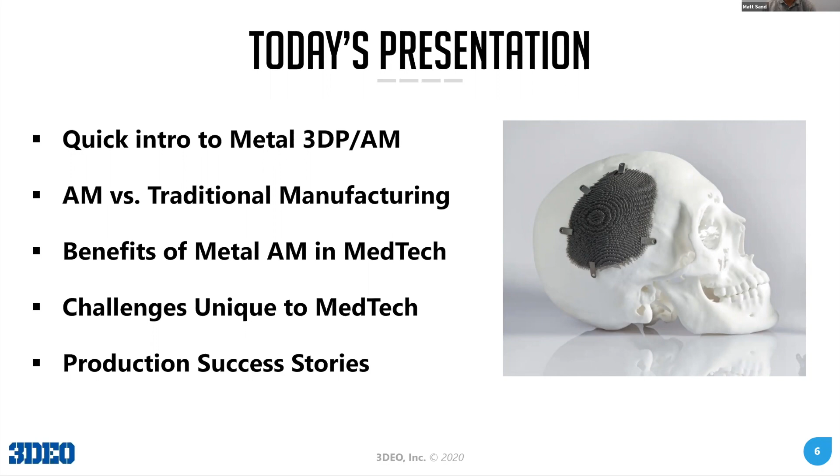So let's talk about today's presentation and what we're actually going to cover. We're looking at first a quick intro to metal 3D printing or additive manufacturing. We're going to compare additive manufacturing to traditional manufacturing, and we're going to talk about the benefits of metal additive manufacturing in MedTech. We'll talk about challenges that are unique to medical device and medical technology companies, and we'll finish with a couple great production success stories leveraging the power of additive manufacturing.

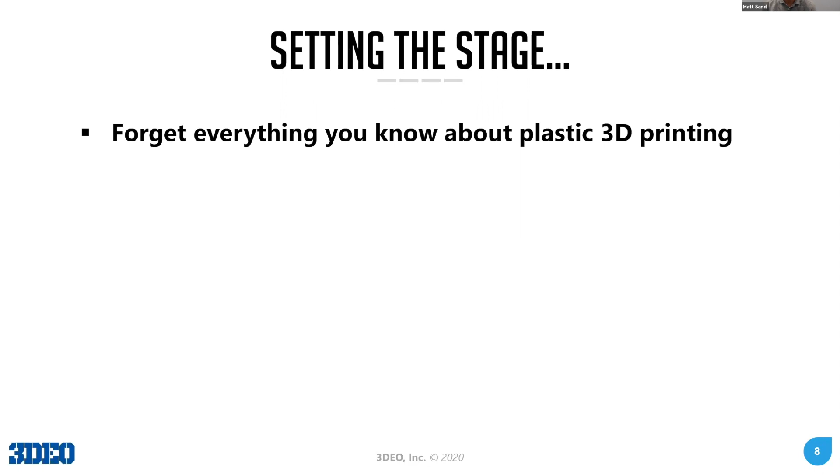So before we dive in, let's just set the stage. First, forget everything you know about plastic 3D printing. When we talk about metals, it's a completely different world. I'll use additive manufacturing a lot, aka AM. You'll see a lot of different subtle definitions of what additive manufacturing is compared to 3D printing, and a lot of people try and pull them apart and separate them, but I'll use them interchangeably. Additive manufacturing is the same as 3D printing.

And then something that we'll talk about a lot is sintering. When it comes to metal 3D printing, it usually starts with spherical metal powder. These are very small spheres in the powder. The particle size might be 10 to 50 microns on average. And sintering is what happens when the powder particles fuse together. They sinter together. If you haven't heard that term before, it can be kind of confusing, but that's what sintering is: the idea of taking powder and consolidating it together to make a finished metal part.

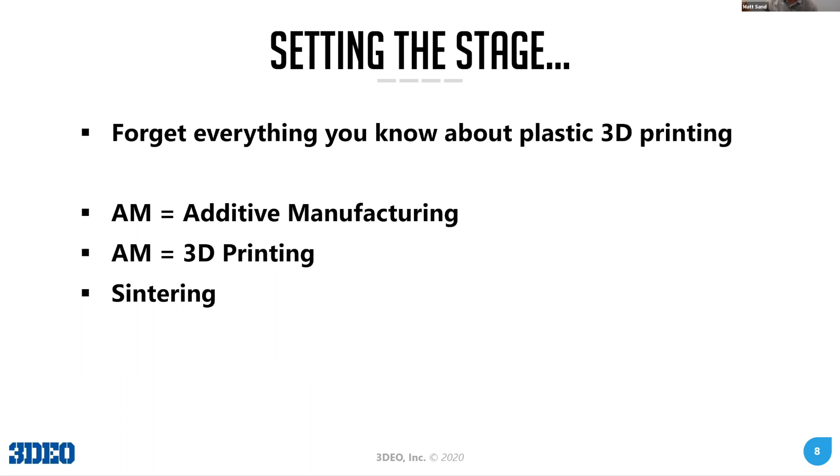When we talk about metal additive manufacturing processes, I'll be the first to acknowledge it can be really confusing. And it's confusing because there's so many different processes. You have powder bed fusion, laser sintering, laser melting. You have binder jetting, which is getting a lot of attention recently, but it's actually a pretty old technology. It's been around for over 20 years. You have extrusion, which is an FDM-like process. FDM is very popular in plastic 3D printing, but it's becoming very popular now in metal 3D printing for prototyping.

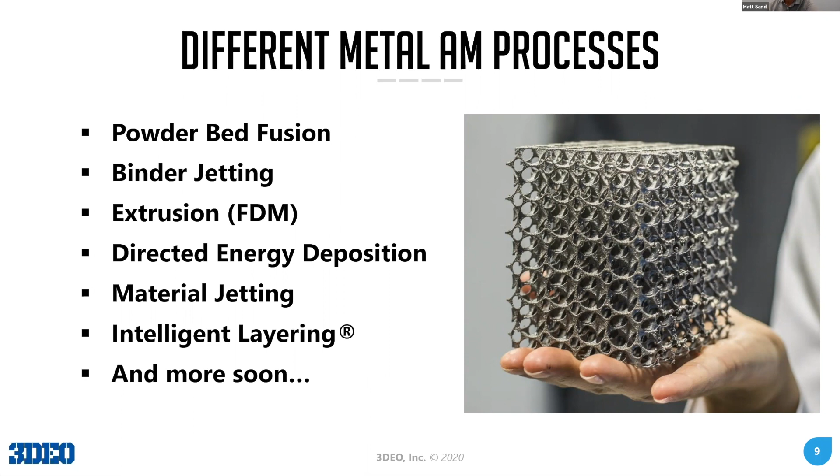So when you're on the outside looking in and you're just thinking, hey, 3D printing is 3D printing, it can be really kind of intimidating and confusing when you first get into it. So just realize there are different processes of metal 3D printing, and each one has its own pros and cons as you get into it.

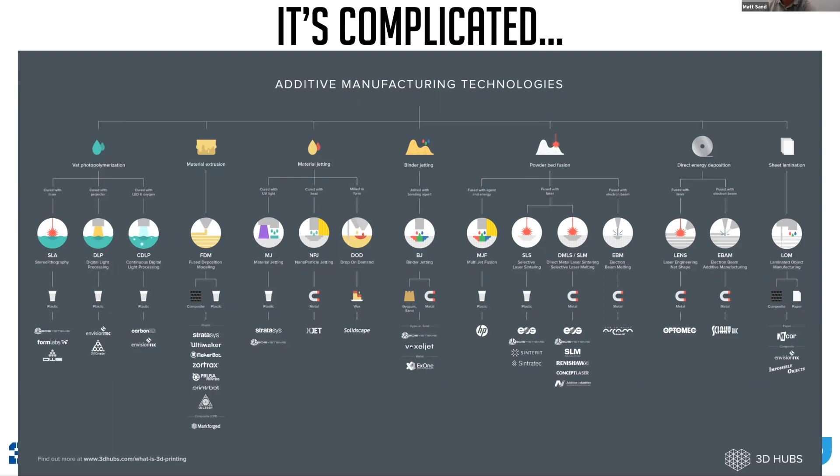Great, so let's move on to the next section, which is additive versus traditional manufacturing. And this is kind of interesting to look at, especially from the perspective of economics. How are the economics of additive manufacturing different than traditional manufacturing, and when would you actually implement additive as opposed to traditional? The first question I just want to ask, because I think it's kind of an interesting brain teaser, is where are all the production parts?

It's kind of interesting when you think metal 3D printing has been around for 30 plus years. Laser sintering, DMLS type of technologies, they've been around for decades, and yet we don't really see that many metal AM parts in production. And the first point that I think is important to make is when it comes to production, it's very different. Customers think about production versus prototyping very differently.

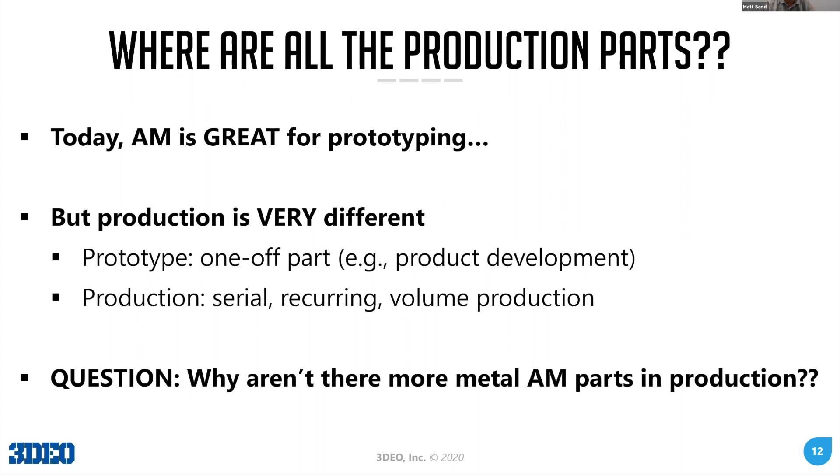Of course, prototyping is great for one-off production, for product development, for iterating on different designs. But when it comes to production, that is serial, recurring volume production, the thinking is kind of different. And in our experience, working with customers exclusively on production and no prototyping, cost reigns supreme.

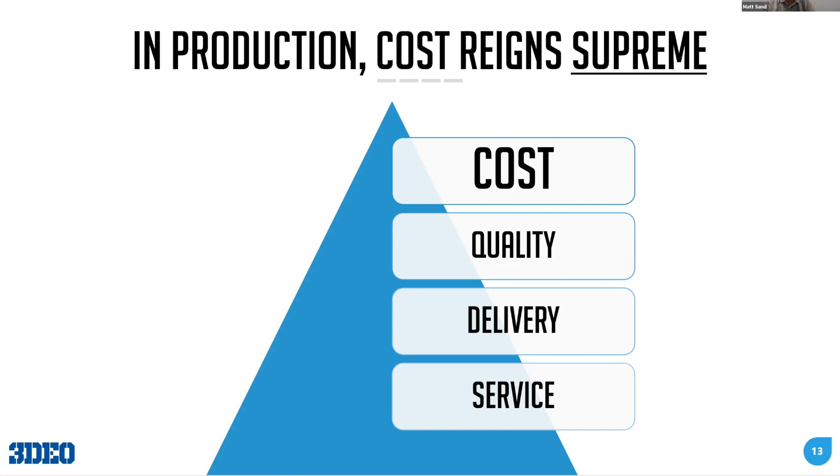So when we see the QCDS framework that we're all familiar with, cost really does reign supreme in this equation, because customers in production assume you're going to have quality. They assume you have on-time delivery or better. They assume you have good customer service. So what gets you at the table and keeps you in the game is being cost competitive. At least that's been our experience competing against the traditional manufacturing of CNC machining and metal injection molding.

So if cost is so important, let's look at how the economics actually play out in additive manufacturing versus traditional manufacturing, and where additive manufacturing could potentially have an advantage versus traditional manufacturing. The first is tooling. And in the category of upfront cost, tooling would be one of the main costs that traditional manufacturing typically has a lot of upfront expensive costs, whereas additive manufacturing has potentially no upfront costs.

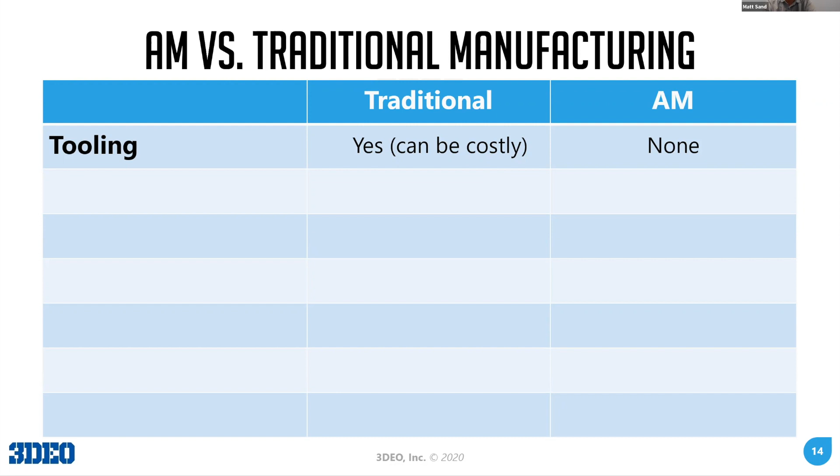Of course, if there's some post-processing requirements and you need to build a fixture to process the parts, then maybe there is some upfront cost, but it's really a fraction of what traditional manufacturing costs, especially when we think about metal injection molding and you actually need a mold and you need to pay as much as $50,000 or $100,000 for the mold to be made. It can be very costly.

MOQ is minimum order quantities. So in traditional manufacturing, it's thousands or tens of thousands plus, whereas in additive manufacturing, your minimum order quantity potentially could be one. 3DEO's minimum order quantity at this point is about 1,000 pieces per year, or about 100 pieces per month. So that's kind of when we look at production opportunities, moving things into production, that's kind of what we're looking at.

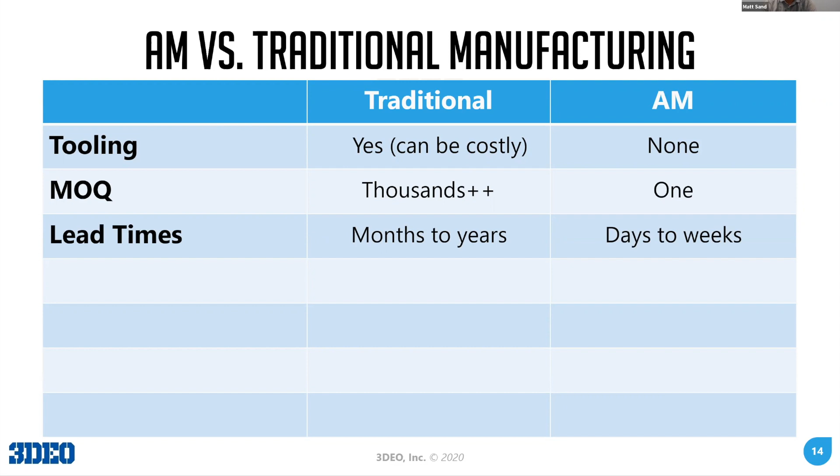But even at the idea of hundreds per month, or for high value applications, it might be tens or dozens per month. It is very different than traditional manufacturing. When it comes to lead times, traditional manufacturing is looking at months to years, whereas additive manufacturing literally could be days. So lead times is pretty game-changing when it comes to the benefits of 3D printing and how you might implement that in production.

Of course, ease of innovation with 3D printing is undisputed at this point, versus traditional is very costly and very difficult. Very low, if no material waste. Like FDM is a great example of a process where the only material you're putting down is the actual material dedicated to the part. So it could be no material waste, versus medium to high with traditional.

Complexity is very costly. I'll show you a cost curve in a minute that shows the more complex a component gets with traditional manufacturing, the more expensive it becomes, whereas with additive manufacturing, complexity doesn't matter as much because we're building parts on a layer by layer basis.

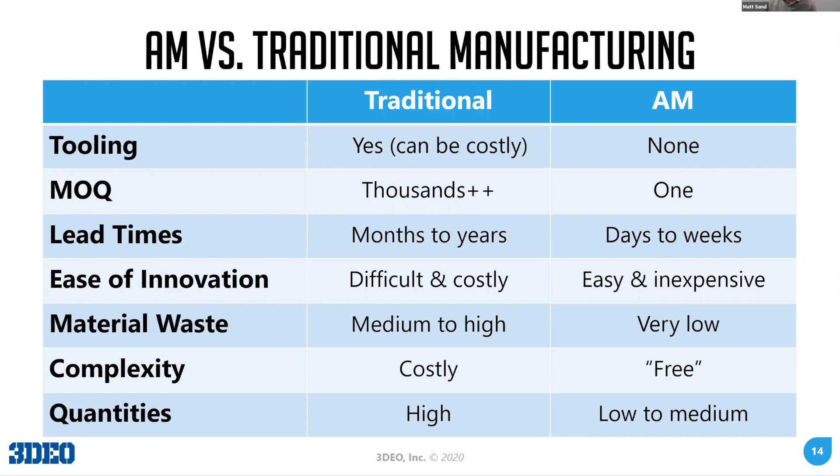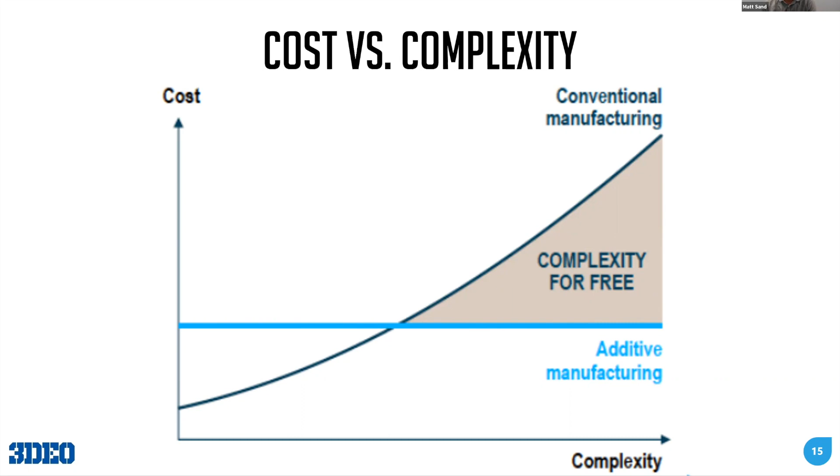So this is where we get the idea that complexity is free. Of course, that's not entirely true, but just as a general rule of thumb, for additive manufacturing, that definitely is the case. Then let's look at cost versus quantity.

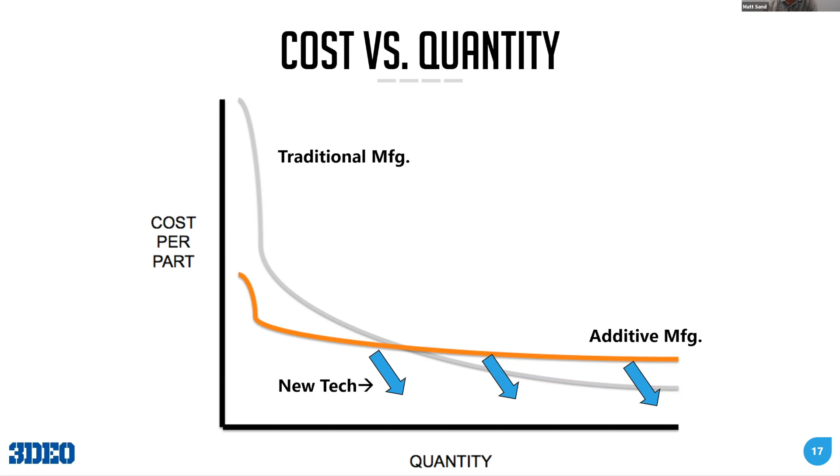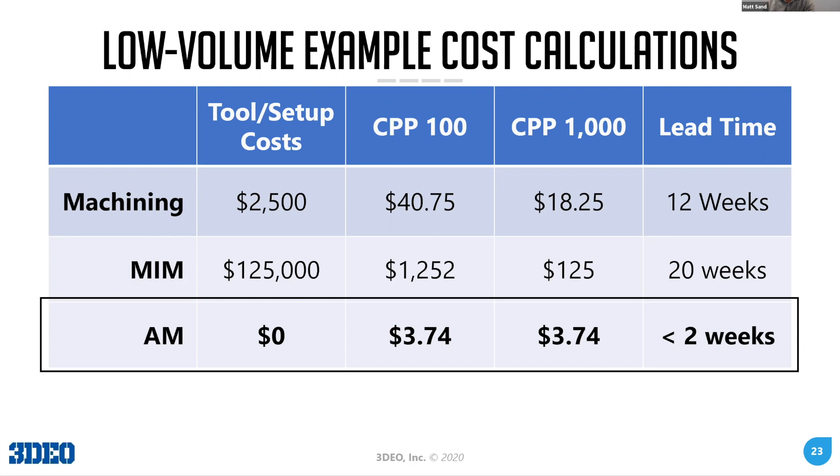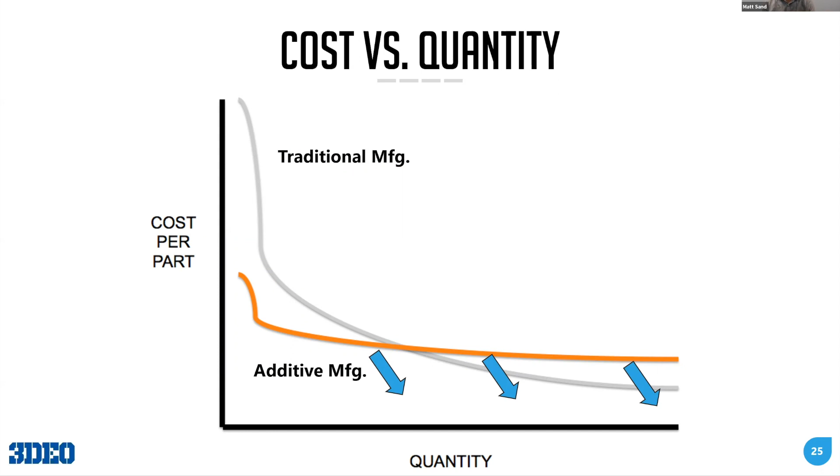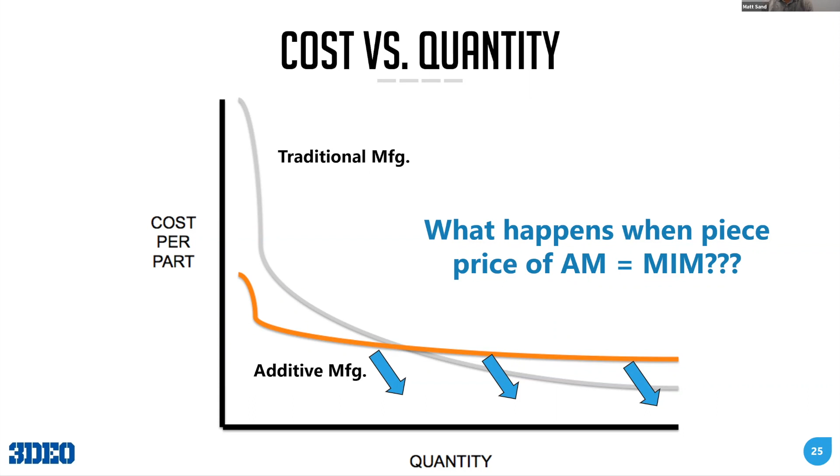This is an interesting question as well. What happens when the piece price of additive manufacturing is the same as metal injection molding? You bring all the benefits of 3D printing to the customer without a lot of the upfront costs, without the minimum order quantities, with everything else we talked about in terms of benefits of 3D printing. So it's a pretty exciting opportunity.